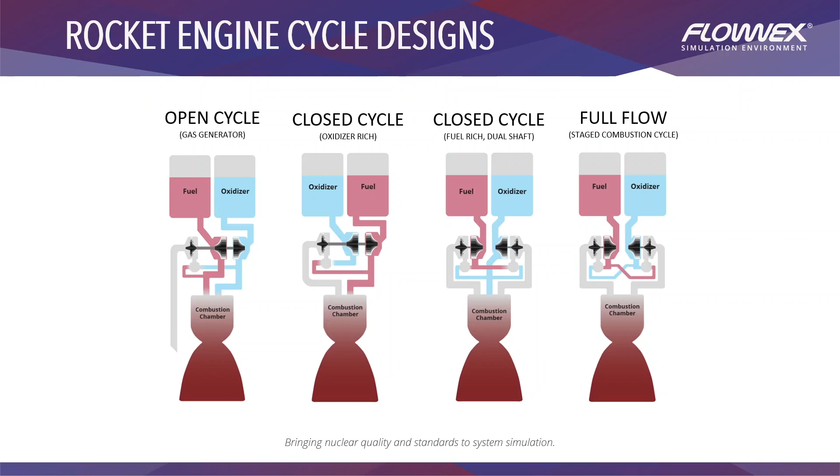The products of both preburners are then essentially sent to the main combustion chamber, where the fuel-rich and oxidizer-rich products are then combusted. These products are already at a very high temperature and pressure, resulting in a much better combustion process.

The different cycles have been used, having different strengths and weaknesses. We will now look at one of the closed fuel-rich dual-shaft cycles called the RS-25 rocket engine.

So one of the more complex rockets that has been developed is Aerojet Rocketdyne's RS-25 liquid cryogenic rocket engine, used as the first stage propulsion system for NASA's Space Shuttle, and now the Space Launch System, also known as the SLS. This rocket uses liquid cryogenic hydrogen and oxygen as the fuel and oxidizer.

Rated at approximately 491,000 pounds of thrust at its nominal power level, it essentially packs quite a punch. The original engine can be tracked back to the 1960s, with development starting in the 1970s. The first flight for this rocket engine was for the STS-1 program on 12 April 1981. Since then, this engine has had several upgrades and improvements with regards to safety and performance as well.

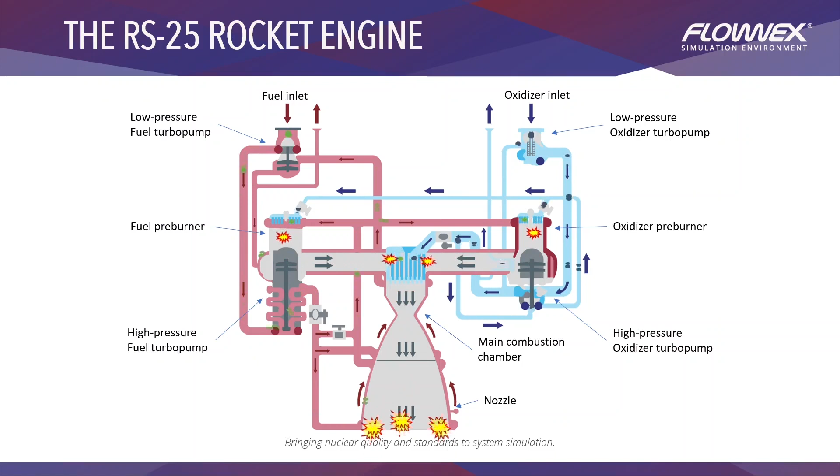So essentially, this can be seen by this animation, which shows the complexities and interdependencies of such a system. For example, when reducing the oxygen to the pre-burners, the turbo pump speed will decrease, which will then decrease the flow rate of the fuel or oxygen, which will decrease the fuel and oxidizer to the pre-burners and reduce the flow rate to the main combustion chamber, ultimately reducing the thrust. In essence, the entire system is strongly interdependent, which makes it extremely difficult to simulate using three-dimensional computational fluid dynamics software.

So, what would be needed to simulate a large interconnected system such as the RS-25 rocket engine? First of all, you would need a simulation software package that gives you the capability to use different fluids, such as gases, liquids, and mixtures. It should also include the ability to evaluate the properties of cryogenic fluids, and should have the ability to create custom fluids as well.

Pressure drop components should also be readily available to ensure that the simulation model replicates the true characteristics of a system, including things such as piping, valves, bends, and so on. Turbo pumps should also be modeled, allowing for speed and power calculations for different conditions. Another important aspect for such a system would be to implement a control system.

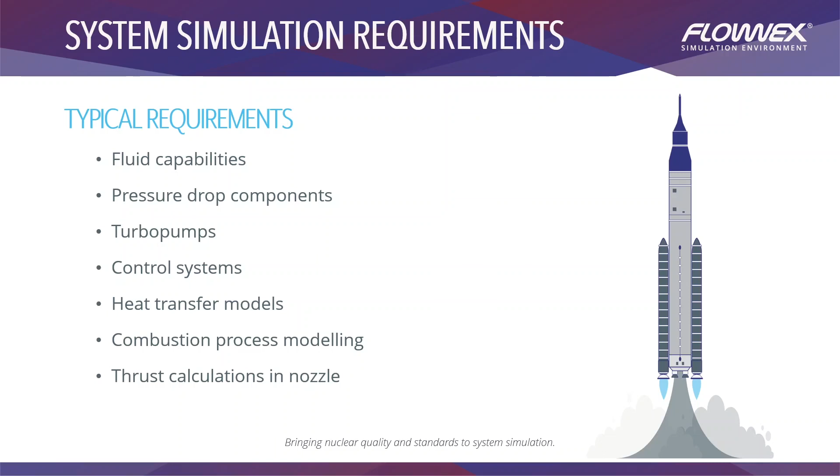So increasingly, it has become more important to evaluate cycles such as the RS-25 as fast as possible. However, when the complexities of the rocket engine are taken into consideration, 3D CFD analysis is just not a viable option. So simulating the system components of the rocket engine in its entirety is important to understand how all these components will interact with each other and how the system will perform at different operating conditions. Changing parameters in the system and assessing the impact on performance is tedious using 3D CFD software, and could take weeks for each iteration to complete.

So this is where Flownex has gained popularity. Flownex is the industry leader in 1D CFD software, allowing for the system simulation of large interconnected thermal fluid systems, capable of fast transient and steady state solving times, and introducing the ability for rapid system cycle design iterations. Flownex has been used extensively for R&D purposes where 3D CFD just cannot compete. Flownex uses fundamental physics and theory from leading research to solve some of the world's most complex thermal system problems.

Flownex is essentially an engineering tool that can be used by engineers in the design and analysis process of thermal fluid systems. It solves the fundamental physics for flow and heat transfer components of large thermal fluid systems. Flownex houses a large library of standard components used in industry, advanced fluid models, a control library, and integration with third-party software such as ANSYS, MATLAB, and Simulink.

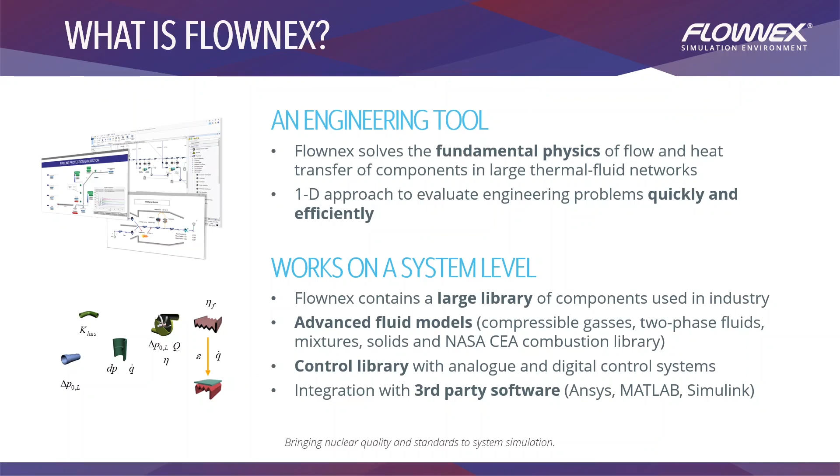Ensuring the best standards of quality compliance, Flownex is developed within an NQA1 and ISO 9001 environment. Flownex also has a user-friendly interface with a help manual conveniently accessed through using the F1 button.

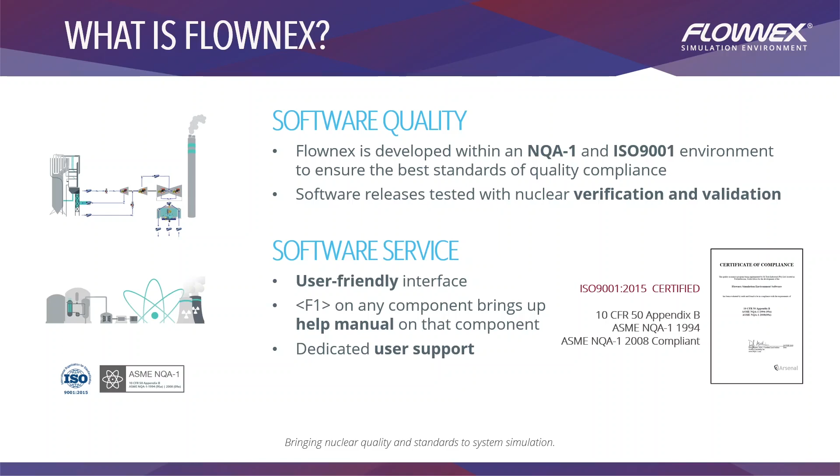As I said, Flownex uses a one-dimensional approach in solving systems. Flownex does this by solving the conservation equations of mass, momentum, and energy on a component level. All components can essentially then be solved fundamentally in true steady state as well as transient, with either fixed or adaptive time steps.

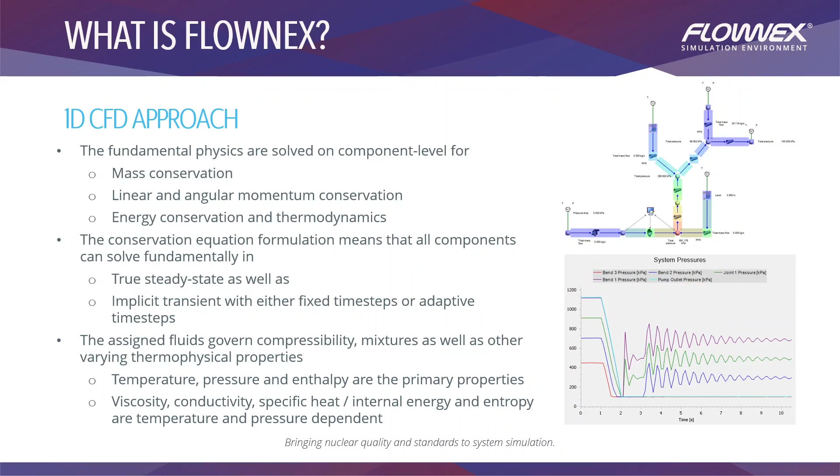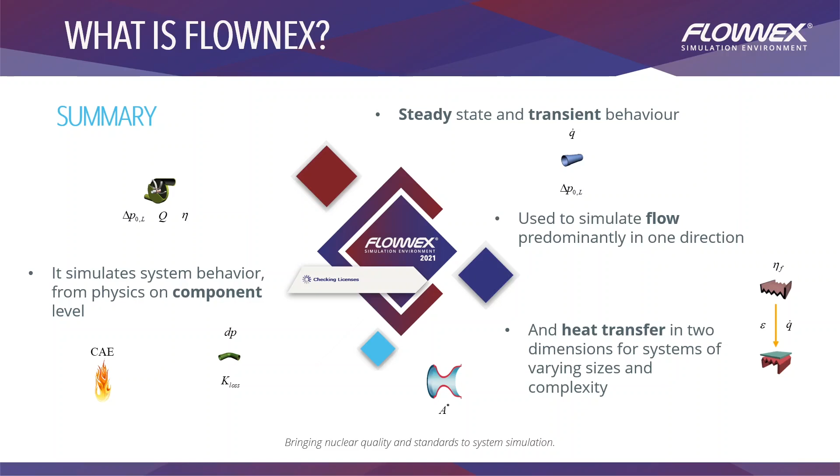So in summary, Flownex can be used to run steady state and transient simulations where flow is predominantly in one direction and with heat transfer essentially in two dimensions. It simulates system behavior from physics on a component level. So this brings me back to the typical requirements for such a large interconnected thermal fluid system, and how Flownex can be used in the design and modeling of such systems.

So what capabilities does Flownex provide the user in the simulation of such systems? Flownex gives you several fluid models such as liquids, gases, mixtures, and two-phase fluids. It also allows you to create your own custom fluid and allows for the evaluation of cryogenic fluid properties.

Flownex contains a large library of standard pressure drop components found in most industrial applications. This essentially includes components such as piping, bends, valves, and so on. Custom pressure drop models can also be created in Flownex if needed, and coupling to third-party software such as ANSYS Fluent for specific custom complex geometry can also be done.

Flownex also gives you the ability to model turbines, compressors, and pumps. These components can either be used with specific manufacturing data provided, or can be used in the design process to find the appropriate pump or turbine.

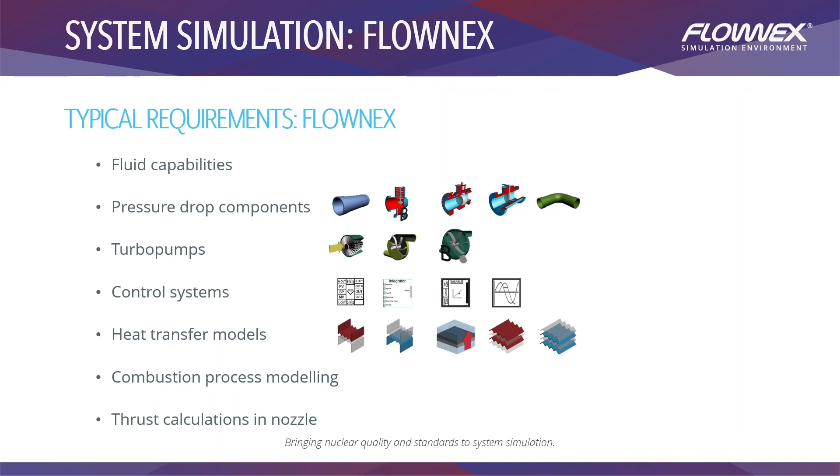And then lastly, Flownex also allows for calculating the thrust for a nozzle found in rocket engines. The exit thrust nozzle can be used to model subsonic as well as supersonic flow at the outlet of a flow network with gases and superheated fluids.

Now that we have discussed the complexities of modeling a liquid rocket engine and how Flownex can provide the user the ability to solve such systems, I will now show you a live demonstration on how to model a basic combustion network in Flownex. And after this, we will look into the full system model of the RS-25 in Flownex itself.

Okay, so we are in the landing page of the Flownex simulation environment, and just to give you a quick overview of how it essentially looks, you would have different ribbons here at the top for different options in Flownex. At the left-hand side would be a properties window for components, viewing your inputs and results once selected. And then at the bottom, we have our flow solver convergence, showing you how converged your results are according to the convergence criteria that you have specified.

On the right-hand side, we have multiple inputs, or essentially components that you can use in the library. And then there's a few other options on the solver itself and so on.

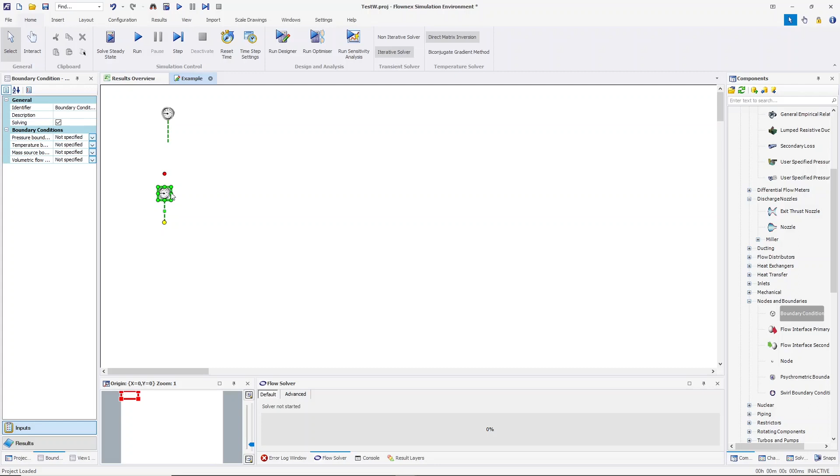So first of all, let's start with boundary conditions. We will have two paths. One boundary condition will be for the inlet of the hydrogen and the other for the oxygen. And for this case, we'll just use flow resistance components.

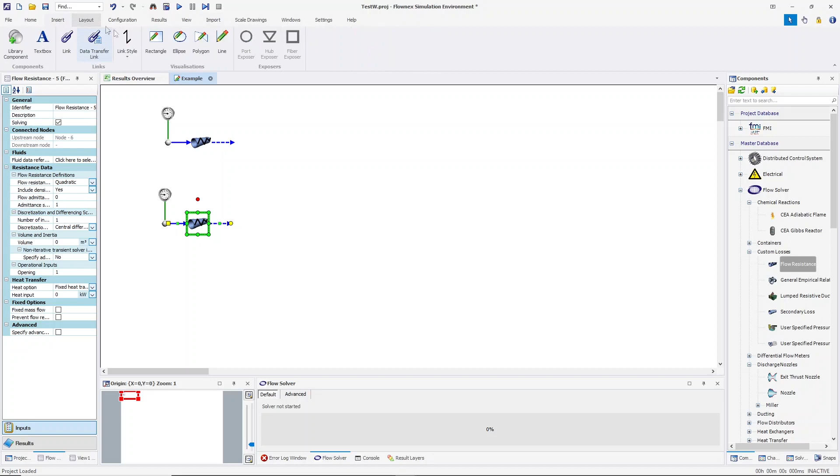And let's just say that for the hydrogen, it would essentially be at the top. Let's just note it down, hydrogen, so that we do not get confused later on in the simulation. And then we do have oxygen right here.

And then for the inlet boundary conditions, let's put hydrogen as for its temperature or for its pressure. Okay, no, we won't specify the pressure here. We will specify the temperature being 222 degrees Celsius, and then a mass flow of, let's start with 200 kilograms per second.

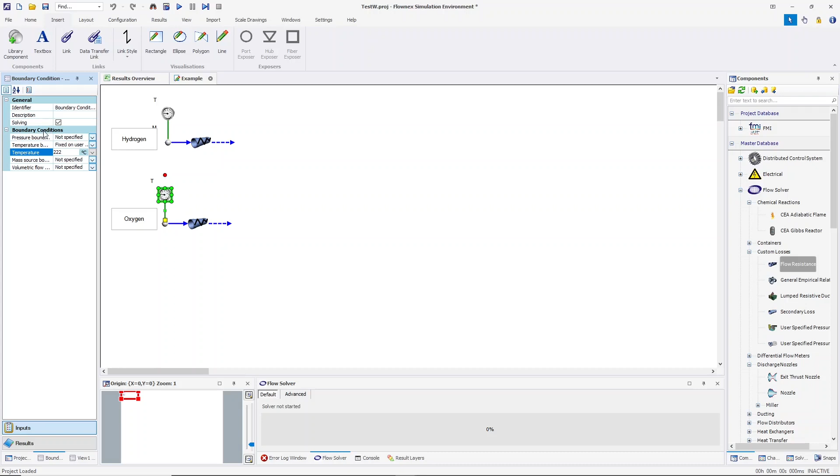Then for oxygen, we'll use a temperature of 222 degrees Celsius, and then a mass source. So we're essentially fixing the mass source at the inlet here of 700 kilograms per second.

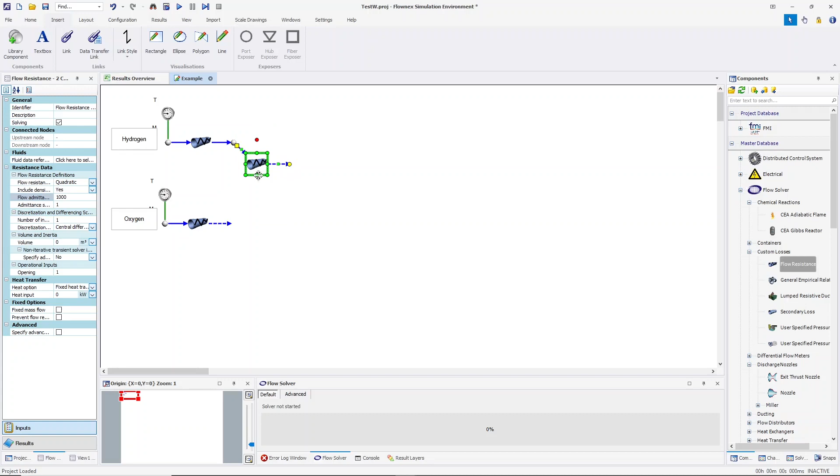Then we'll define the admittance for this flow resistance. I mean, this is just a custom pressure loss model, but it's just to represent the flow of the two branches. We can then copy over these flow resistances and then join it here. So essentially we would have these two flows and it would essentially join.

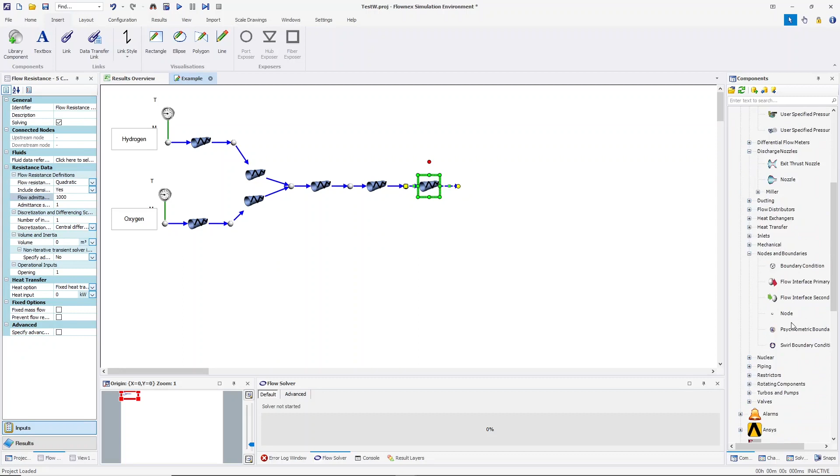And then let's add in another few flow resistances. I'll show you in a moment why this is necessary. And then of course an exit boundary condition, and in this case we'll just define it as a pressure boundary condition of 100 kPa.

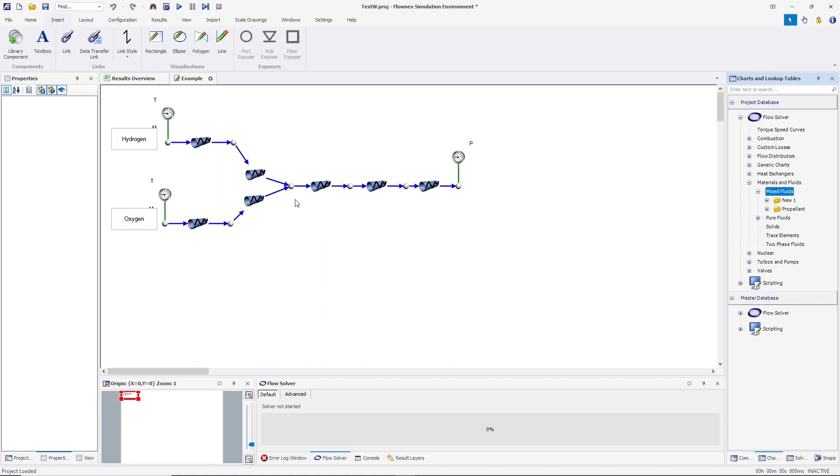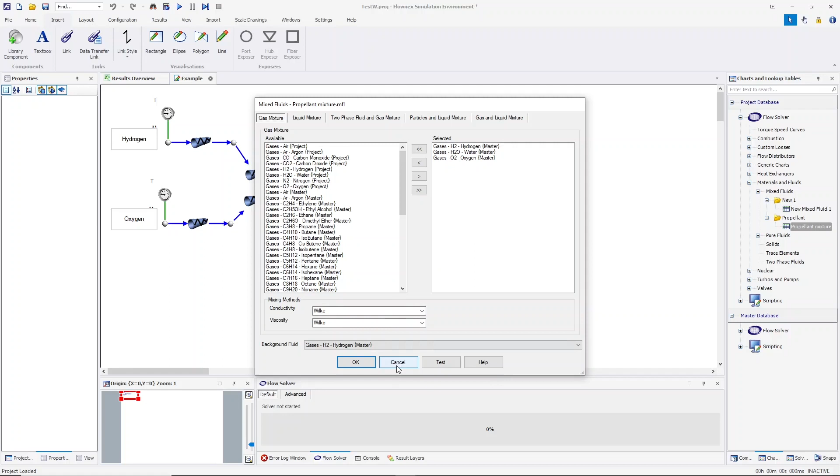Next we need to define the fluid being used in this demo network. So I've already created a mixed fluid consisting, just for an example, of hydrogen, water and oxygen, and that's typically what we'll see for the entire combustion process. We can of course add in more elements if needed, but for this demo this should be sufficient. And then we can add this fluid to the network, so we'll go to mixed fluids, propellant mixture, and we should be able to solve by now.

And there we go. We can also just tidy this up a little bit. And let's then just evaluate on some of these nodes. For example, you would be able to see the mole fraction. Of course, we have not included the mass fraction at the inlet.

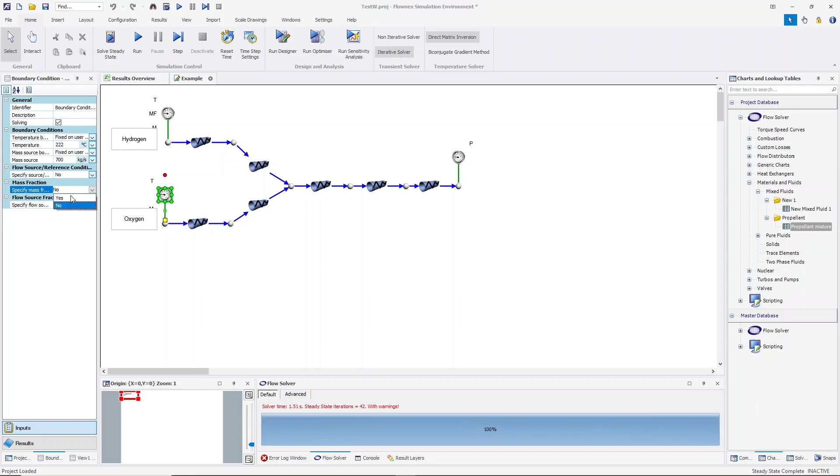So let's just define that here on the boundary. We have to assign the mass fractions for each inlet, specific to that specific fluid. So we'll add oxygen here and hydrogen at the other side, and then we'll see that we have a certain mass fraction at each node.

So let's also just quickly drag in the hydrogen, oxygen, and sorry, not the oxygen, water and then oxygen. And let's create our own caption here, being hydrogen, and this will be the H2O, and here we have oxygen. Okay, and we can align these.

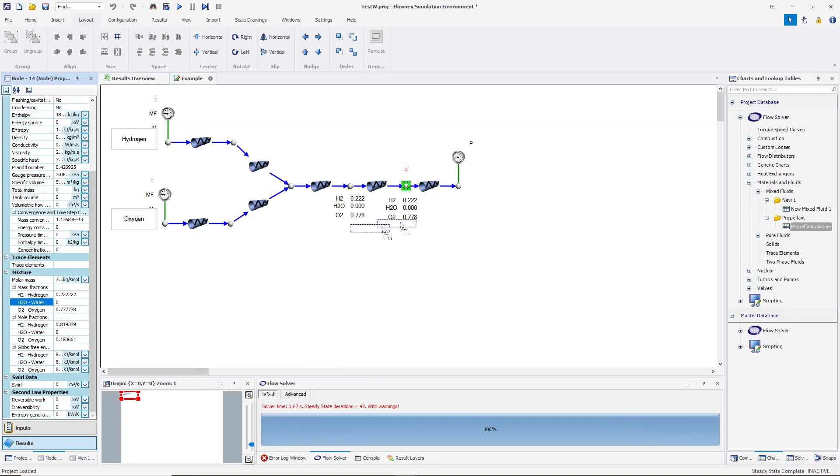And let's do the same for this node right here. We can drag in. So what we can rather do, we can copy this over to here and then drag in these values and just overwrite them. This way we are saving a little bit of time to essentially recreate the format of these labels. And we can then just have equal spacing, but of course we can make it neater at a later stage.

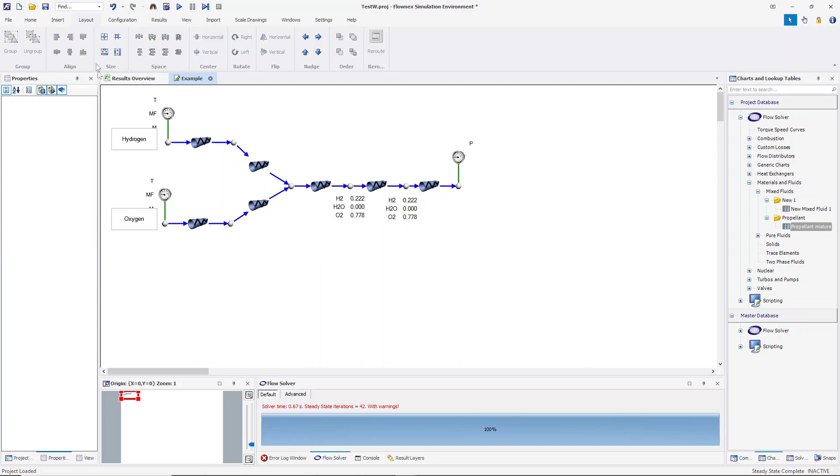Okay, we can solve again. You will have no issues there. What we can do now is add in a combustion process. So we can find this at the chemical reaction branch, the CEA adiabatic flame, and we can connect it up such that it links up on the node before and after a flow resistance.

And what we can see now is, let's also just drag in the temperatures, and another temperature here. So of course the temperatures are the same before and after, as there's no, we haven't solved this network yet. So what we would do is, once this has solved, we should see a change in temperature as well as a change in the mass fractions.

Okay, so there you can see the temperature has risen to 2520 degrees Celsius, and we have used quite a lot of our oxygen and hydrogen. You can see we have quite a few left, or a large mass fraction of hydrogen, and a lot of water vapor has been created as a product in this combustion process.

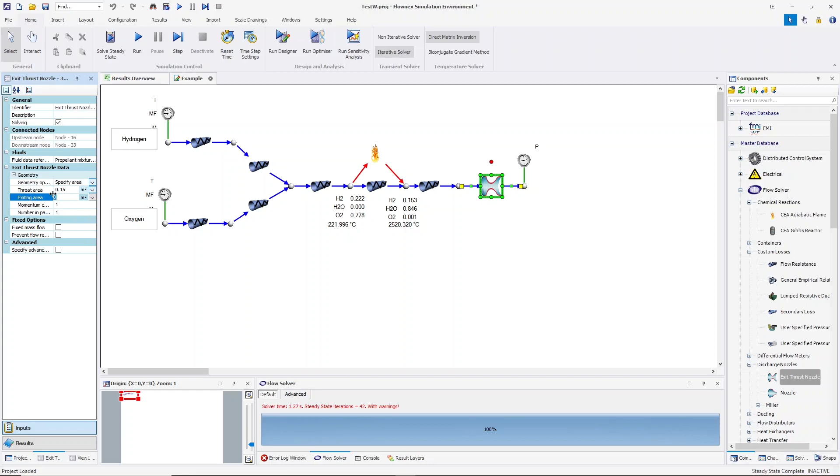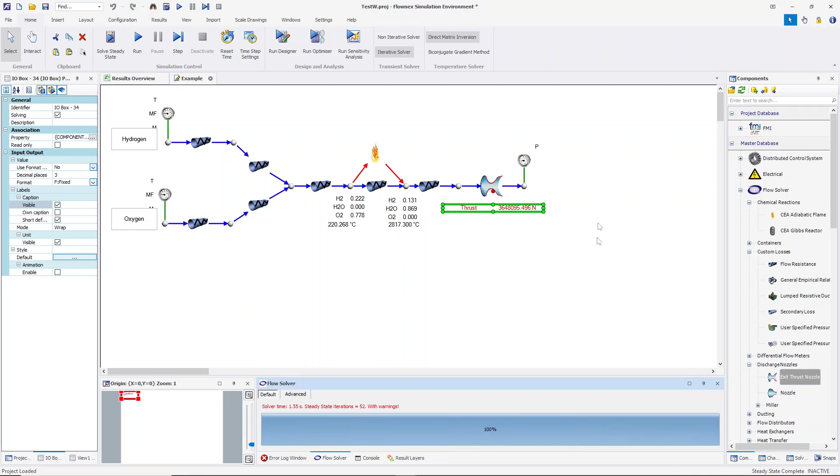And we can then, let's specify the area. This would, of course, be dependent on your specific geometry, but we'll just use this as an example. And we can then drag in the thrust that is being calculated by Flownex. And here you would see essentially this is the thrust being calculated for this specific condition.

So what we can then do is add in maybe a line graph. So what I want to evaluate is the thrust being calculated. And then, of course, what I want to change in this system is the output pressure. This would give you a rough idea: as a liquid rocket engine is ascending into the atmosphere, the atmospheric pressure would change, and this would affect your thrust, and we would be able to see it in a transient simulation.

So let's change the minimum and maximum for this track bar, to 100, between 10 kPa and 100 kPa.

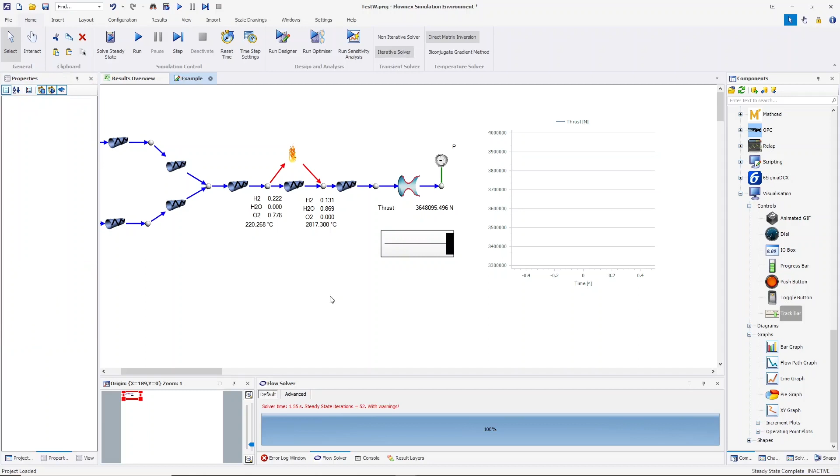Let's solve it again, steady state, and then essentially in transient, and then you can see it is being calculated here, the thrust of this nozzle, and we can then change the outlet pressure, or in this case the atmospheric pressure, and you would see how Flownex can essentially then calculate the thrust for different exit pressures.

So this just gives you a basic idea of how you would be able to implement Flownex for a combustion process, for a very basic nozzle combustion system, and then essentially calculating the thrust for a rocket engine, very similar to what we would see in an RS-25 rocket engine. And essentially, we will now have a look at the full RS-25 rocket engine.

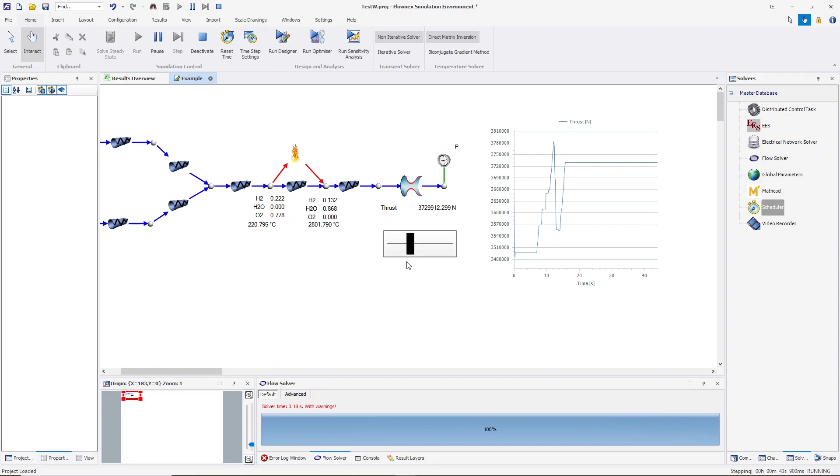This essentially just shows you a very basic modeling process. This is the entire RS-25 rocket engine being modeled using different components in Flownex, from its standard components in the library.

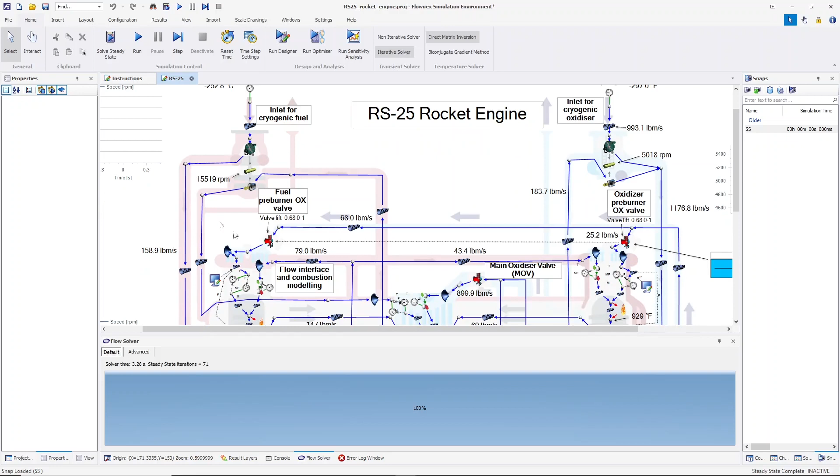So essentially this is the inlet for the hydrogen. Here's the low pressure turbo pump being created from a pump, a shaft, and turbine component. And then this branch is essentially fed to a high pressure turbo pump.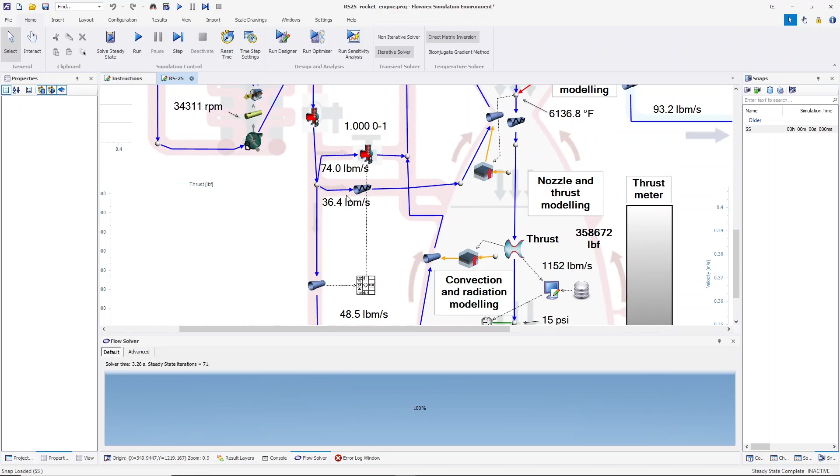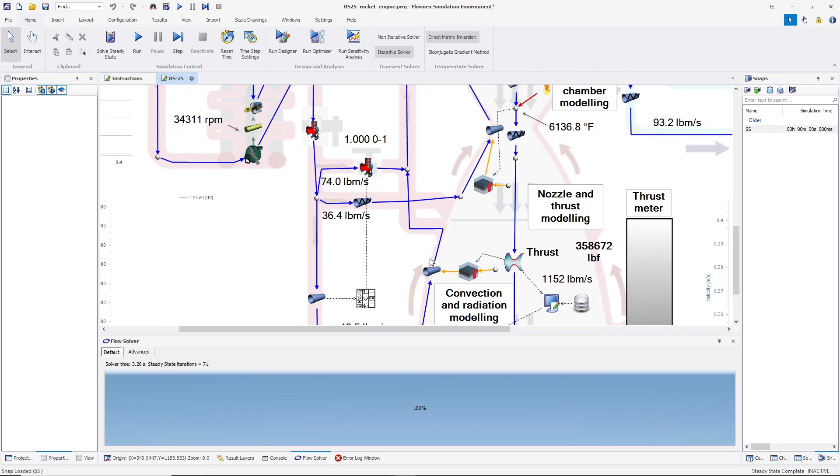This flow is branched to 3 different branches. One going directly to the nozzle - you can see this is the nozzle itself, being used for cooling purposes. Here there's a combustion process going on, with some hot gases, and this radiative heat is being transferred to the material, while the cold fuel is used to help with cooling of this material as well.

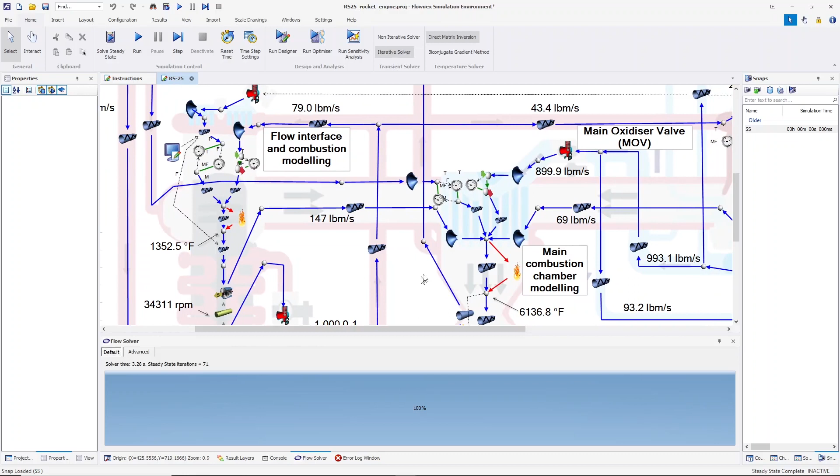Then we have a different branch going to the nozzle, and another branch tapped off directly to the pre-burners, fueling these pre-burners - you can see that right here. The branch going through the nozzle also propels the turbine side of the turbo pump at the low pressure turbo pump, and is then fed back into the main combustion chamber.

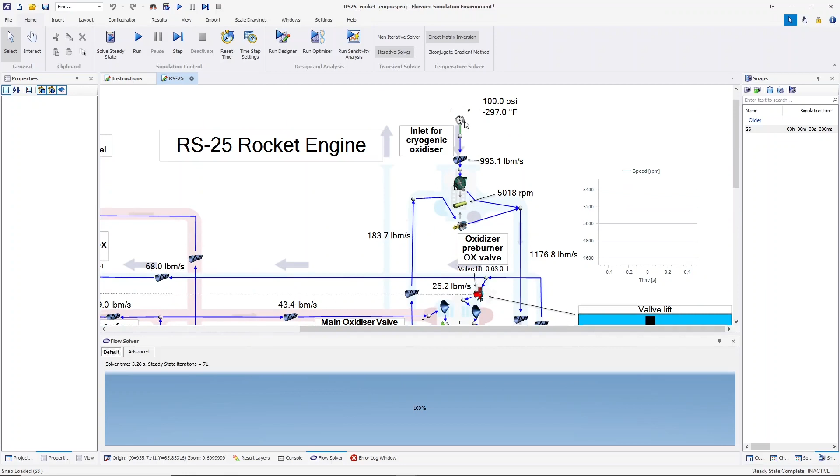Then we have a similar setup for the oxygen side, where we have a low pressure turbo pump being fed to a high pressure turbo pump. Interesting here, we do have multiple pumps and one turbine, simulating this turbo pump right here, with some complex power matching going on.

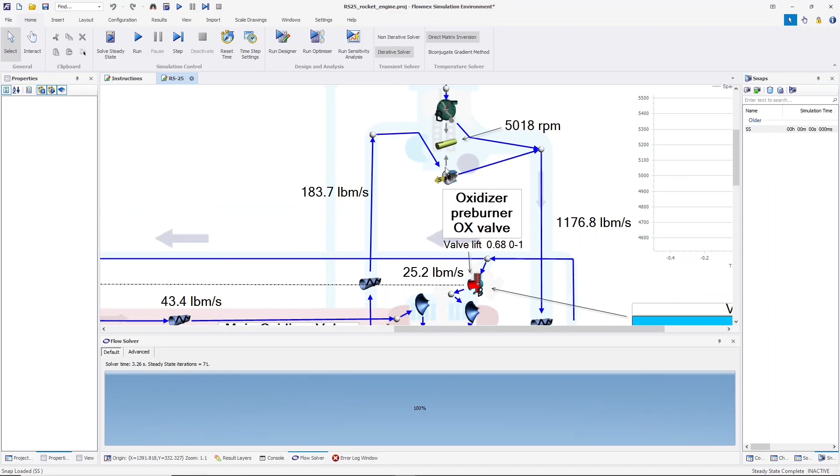Then one of this is being branched off. The flow is branched off - one to propel the low pressure turbo pump, and then the other: a portion going into the main combustion chamber, and one going back to the pre-burners.

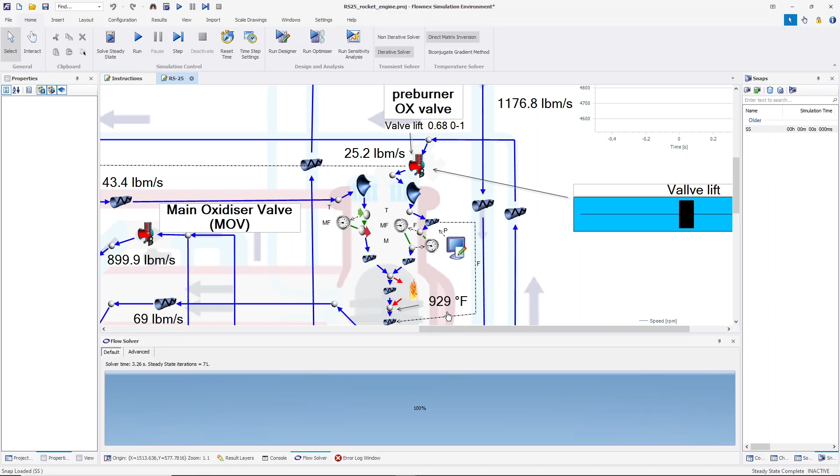This oxygen flow to the pre-burners is how the RS-25 is being controlled. The valves to the pre-burners regulating the oxygen can be adjusted, and this would affect the entire system, and ultimately the thrust of this rocket engine.

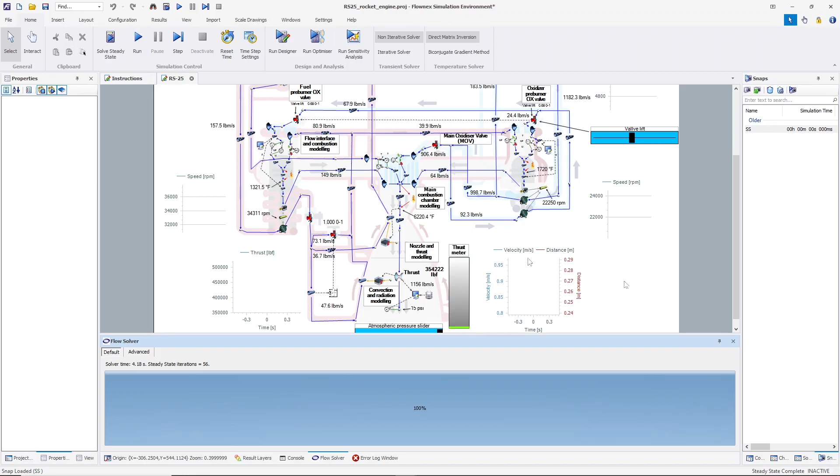So let's just solve it steady state, and what we will use today is the non-iterative solver that has been released in the new Flownex release of 8.14, which will allow us to simulate larger systems in a faster time.

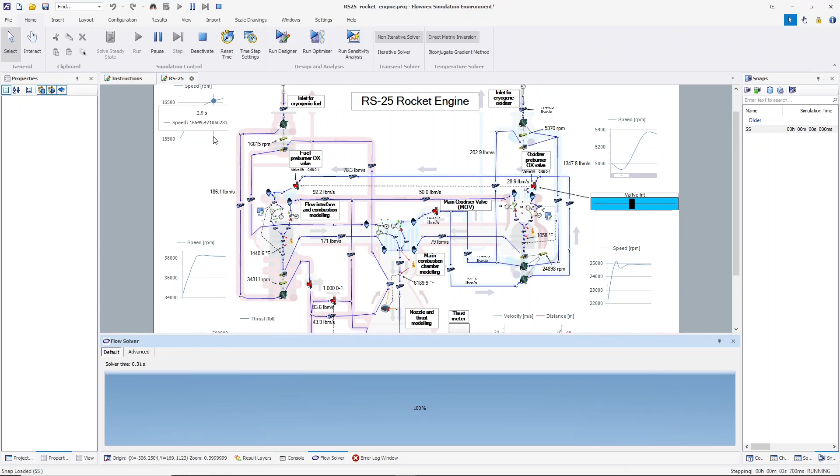So let's start running it transiently, and you can see here how the speed of each shaft, the turbo pumps, changes as it's seeking equilibrium, and we can see the thrust being calculated at the lower left hand side. What I've added in this model is a script that calculates kinematic equations.

Taking the thrust into account, and then calculating the distance from sea level, the velocity, and also using these parameters to change the outlet pressure. You can see it is reducing as the rocket is ascending through the atmosphere.

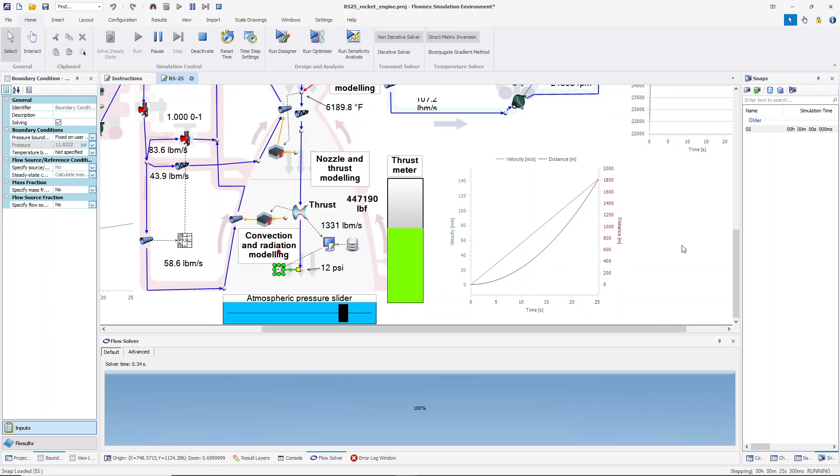So you can see here on the right hand side the velocity and distance being calculated, and this essentially - such a model will enable the engineer to get a better understanding of how this engine works, and also how it would perform to changes in the system itself.

So basically you can also then change the valve lift and see how that would affect your thrust. You can see the effect of that valve being closed affects your thrust.

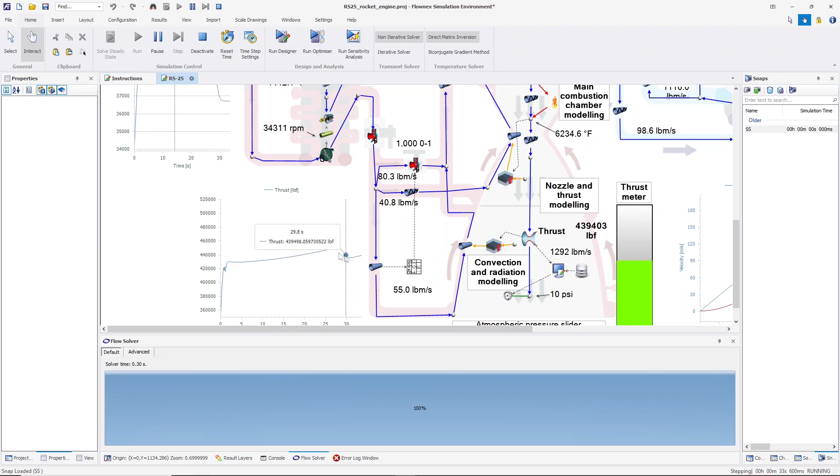Simulating the entire system interdependently in Flownex would give you an overall view of such a system, and you would be able to connect it maybe to different software where this information might be quite useful, or even use it for different cycle designs. There's actually quite a few options available for using Flownex for such systems.

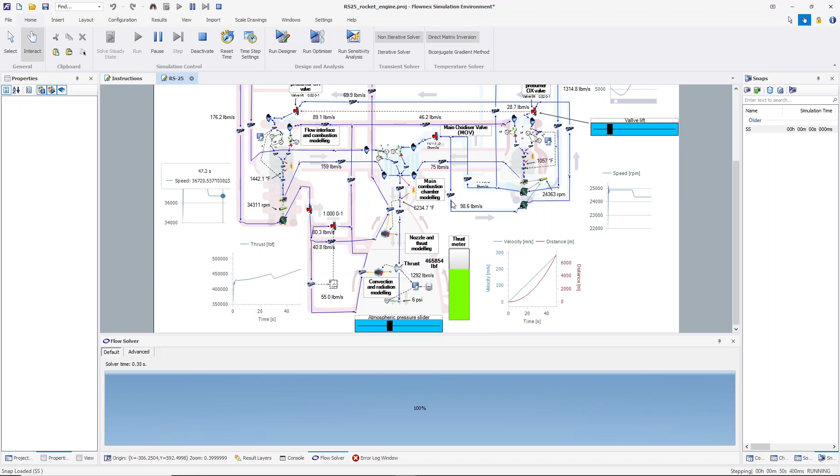Also, this is a very high-level simulation of the RS-25 rocket engine. Of course, you can start zooming in and actually simulating smaller and smaller parts in more detail, depending on your specific thermal fluid case.